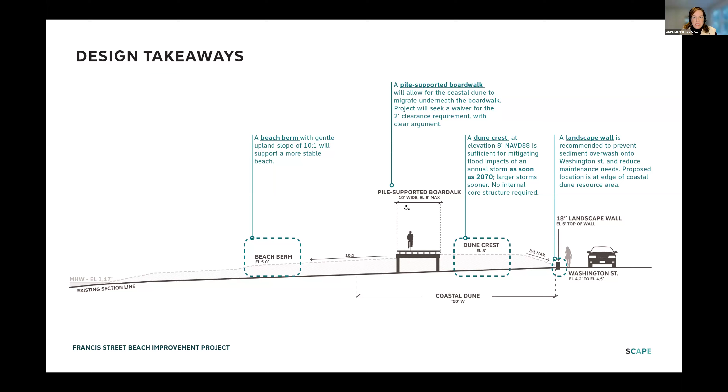So that's pretty good. And then you see that landscape wall—that's a synthesis of the takeaways that we're using as a basis of design.

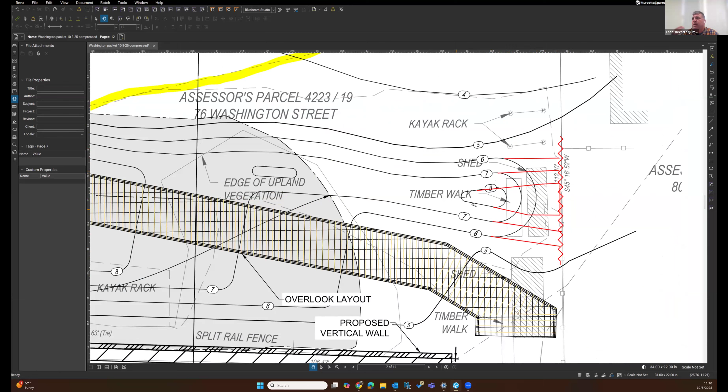In Woods Hole's recommendations, which we agree with completely, specifically on the south side, the grading was dropping off, and there's an existing sheet pile wall along here. To close this off, there will likely need to be a slightly longer sheet pile wall or an extension of that on the property to tie into the neighbor, allowing the dune to be at elevation and not higher than the adjacent grade on the other side. So there's definitely a proposed wall parallel to this along the beach, just to hold back the sand and the grade to the neighbor's property.

One thing we found out over the last week and a half is that this existing shed actually has a restroom in it. So that'll have to be incorporated into some of the waterfront structures and supplies there that stay as a restroom and water supply. There's going to need to be some work on this interaction here.

And Todd, that's connected to the sewer, right? Yes, connected to the sewer.

On the north side, with the abutting property interested in doing some sort of dune protection, there was a discussion of a high velocity area between this property and the proposed dune, so the high velocity that could potentially scour and cause end scour on the dune will have to be addressed. One option, based on no movement from the abutter or any connection with them, would be to use a geotube along the edge, so any scour would protect the main dune and only damage a small area to be reworked until a connection is made further with the abutter.

And I think Laura's team has some sketches of some of that extra grading that would be needed.

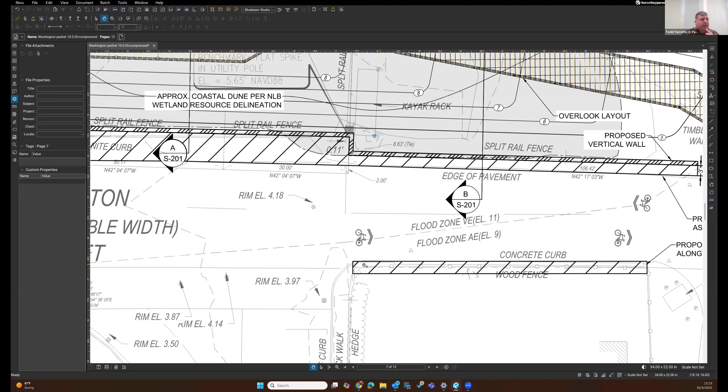What we did discover was the property adjacent to, on the other side of Washington Street, the actual fence currently encroaches onto the public right of way approximately - a little more defined survey work might be needed in this area for the actual property line. But there's a potential that a walkway or sidewalk could be installed on this side, similar to further down on Washington Street. So those are some public safety issues we're evaluating, and Laura, you're going to be illustrating that a little bit better than we are.

Those are the high levels of the structure. One of the things we addressed, with this not having a wall in the dune down the middle of the core, is being able to get the dune functional at 8 feet while maintaining a 9-foot boardwalk elevation. The dune has to be both on the seaward side, underneath the boardwalk in an area, and on the landward side, tying in so there's a full barrier. One of the other challenges is the grades needed on the beach side and tying in ADA accessibility into this beach.

Luckily, this ADA ramp is on the beach rather than in the dune, so burying the structure into the beach is going to be a lot easier permitting-wise than in the dune. We want to make sure we extend it far enough, buried under the beach nourishment, so that if any storm scour occurs, you don't have a drop-off for safety purposes and ADA requirements.

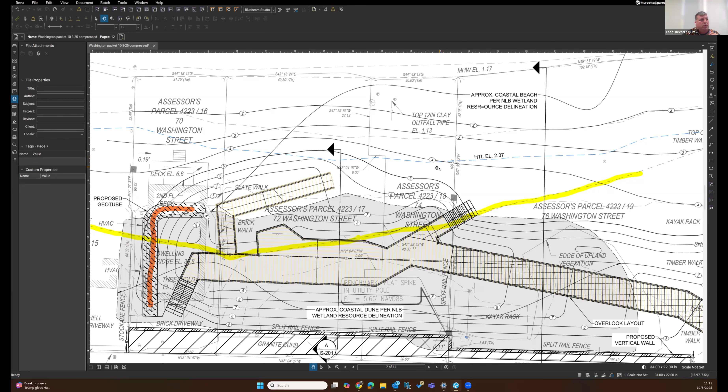It should be noted that we are filling below high tide line and possibly below mean high water. That just adds a permitting aspect to it, depending on what we need to do, but we're definitely going below high tide line. According to this plan, until we get into it there might be a way to address that, but the slopes that Woods Hole Group recommends require us to extend that beach further out.

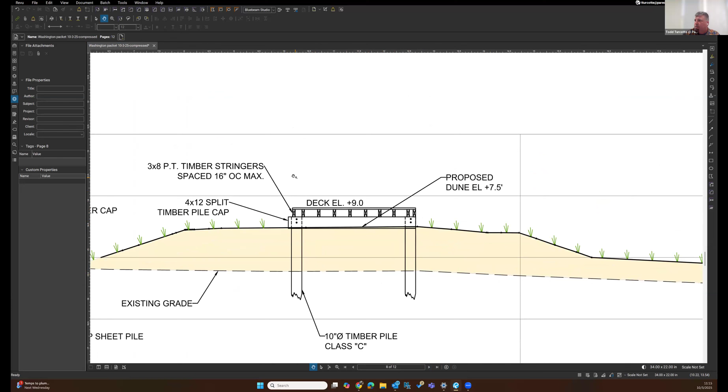To illustrate what we're talking about in the cross section: the minimum, when the deck elevation is at 9, the minimum dune elevation on either side has to be 7.5, so we don't have to have a rail, which would be another 3 feet of obstruction of view and everything else. So we would be up around 12 and a half feet.

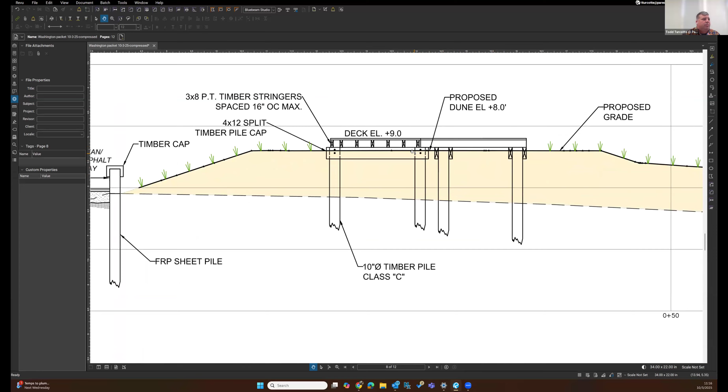Again, landscape wall, pedestrian bicycle path, walkway. Then the areas where the dune is going through the structure is actually at elevation 8, so it'll be right at the bottom. It'll almost be like the boardwalk is floating on the sand - it'll seem like it's not even supported because it'll be right up to the bottom of the structure. So those are the recommendations to get that through.

As stated before, the 2-foot separation is from the dune. The challenge with that permitting aspect is it exists at 4.5. So our approach is to accelerate the accretion of the dune, man-made, and allow that to move through. We're technically 4.5 feet above the existing dune, and we're making it a higher dune - an 8-foot dune. So we're naturally accelerating the accretion, and it's still allowed to move, but that's going to be a permitting challenge that we have.

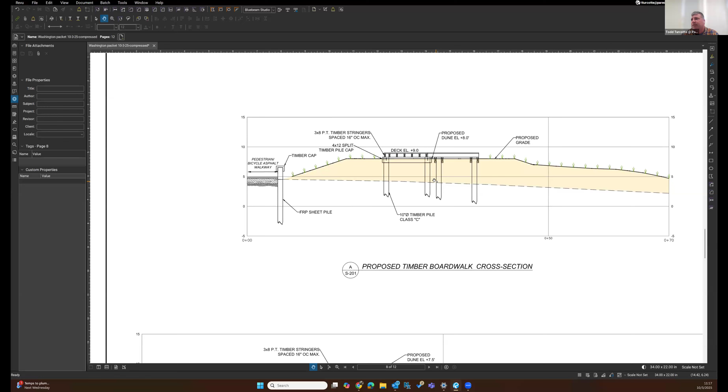Adrian, did you want to highlight any of the other permitting stuff we've been matrixing and going through right now? Sure, I can just talk through the permitting thresholds that we're looking at right now for the project.

Most of them are pretty standard for coastal work. We're expecting an Army Corps of Engineers Section 10/404 permit, the DEP 401 water quality certification, DEP waterways, and also an order of conditions through the Wetlands Protection Act for the project. There is interest from the Division of Marine Fisheries because of shellfish habitat on the beach, but it is restricted, so that is somewhat helpful. There's no Natural Heritage Endangered Species Program priority habitat on the site, and of course this is a velocity zone on the beach, and we will be filling inside of it, so that will be a MEPA threshold.

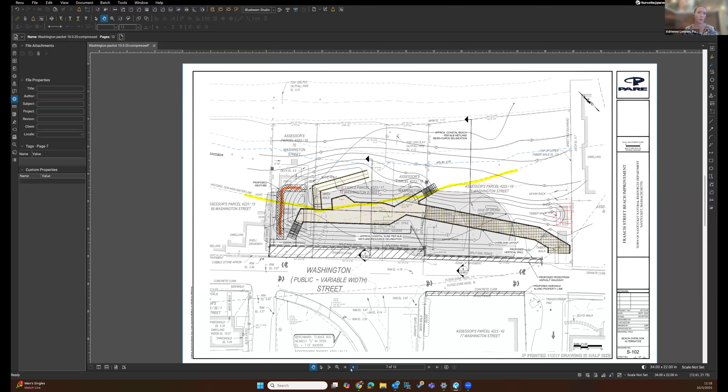There is EJ for MEPA in the vicinity of the project, so we're anticipating the expanded environmental notification form and minimum a single environmental impact report as part of the filing. Generally speaking, the design is not going to influence permitting in terms of thresholds. Everything we're qualifying for, we're going to qualify for regardless of which shape or what the final structure looks like. It's just going to be a matter of how much we need to fill in the resource area and how much we need to move around the dune to accommodate those two designs. But that will all be negotiated with the finer points with the coastal manual as we move through.

I'm happy to answer any questions about that. But I'm looking forward to seeing the design come together.

One other note is we are beyond historic high water line, so there will be the Chapter 91 license required. That was another one. So that's where we're at.

Laura, if you want to continue, or is there any questions? Anything we want to talk about before we jump in? We've sort of begun to interpret the technical understanding that Todd and Adrian are providing into some sketches, but technical questions they can field probably better than we can.

Can I just ask a quick question? This is Rachel. I'm wondering if you could just run through that list of permitting agencies that we need permits from really quickly, again, please. Yeah, absolutely. So federal permitting will be the Army Corps of Engineers.

At the Commonwealth level, that will be DEP Waterways, which is a Chapter 91 license, and the DEP Water Quality Certification Program. Locally, you will administer the Wetlands Protection Act through the Nantucket Conservation Commission. The Division of Marine Fisheries will need to be consulted through the Wetlands Protection Act process because of the shellfish habitat on site, but not the Natural Heritage Endangered Species Program because we don't have any priority habitat on the beach. And then Coastal Zone Management will be in consult or agency consult through MEPA because of the expansion of fill and velocity zones.

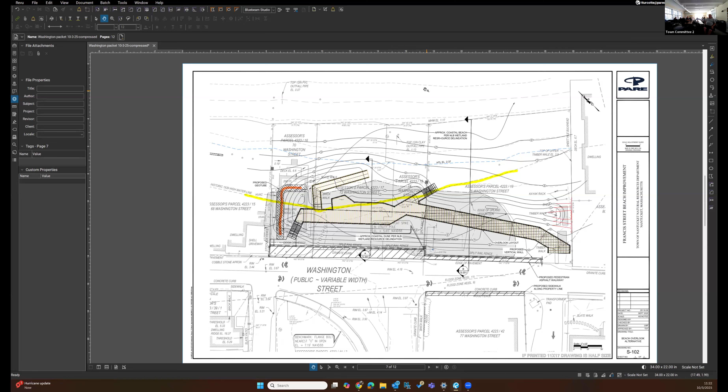Okay, I'll stop sharing. I think probably when I get into some of how we're beginning to interpret this, and caveating that we're still kind of in sketch mode, probably some other things will come up that both Kirk and Todd and Adrian will want to weigh in on.

Okay, so just kind of a site context drawing here. And we, I know last time we talked about that sidewalk that had been built more recently at the crossing here at Meter Street.

So we have an updated aerial photo that shows some of these key constraints. We see that coastal dune is delineated all the way up to the edge of pavement. One other thing of note is that the Washington Street extension does narrow to 17 feet in this area, between the sidewalk and this sort of bump out.

I know that's not really a two-way street, but something to think about as we're trying to tackle this question about no sidewalk. And then you can also see the right of way on the opposite side of the street, which again sits behind that fence line.

So we started to sketch, just in diagram form, a couple of possibilities of how we might address pedestrian circulation. We want to provide an ADA accessible pathway here for access onto the beach. If you're approaching from the Washington Street extension, that's fairly straightforward. If you're approaching from the other part of Washington Street, it gets a little tricky.

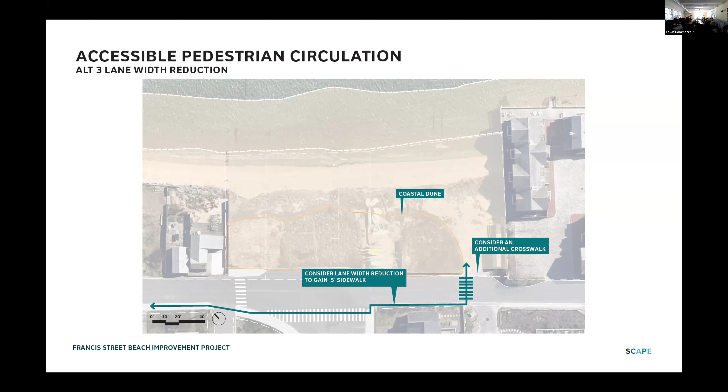So I have a question - do we try to extend that pavement on the beach side a little bit down Washington Street extension and see if the regulatory agencies will allow that? Yes, that's a good idea. Or do we do this version? That home has a fence and garden and everything.

Can I ask a question? Because it kind of goes on to the topic - the idea is this is phase one of many, and this is going to be a longer boardwalk, right? And I hate to bring this up because I wasn't in the original concept questions, but is there a reason that the ADA ramp has to occur on the south end and not at the crosswalk? So we've been talking about this, Todd. The reason for the long-term plan, let me actually just go to it.

The reason for the long-term plan is if you're a bike coming from the Washington Street extension out to all the bike lanes, or even as a pedestrian, this is the accessible path that can continue all the way down. However, in the short term, a major flow is coming this way, and in both scenarios right now, we're showing stairs there.

I was just going to say this, when we get together and talk about grading next week, if we don't have to be 2 feet above the dune with the deck, we may be able to get a ramp on both sides.

I think we need to study it from a design perspective. It's going to change the geometry. Lynn, you've been looking at this really carefully from a technical grading standpoint. I don't know if you feel there's a barrier there, but particularly in the dune swoop version, I think we may be able to get a ramp from both sides. Do you have thoughts, having looked at it a lot this week, Lynn?

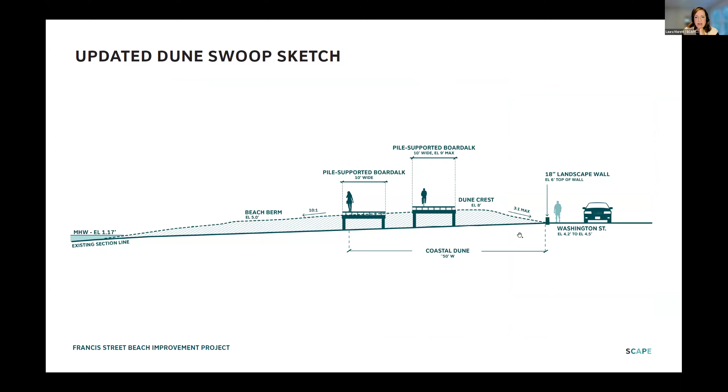So that's one sketch, and this is sort of how it works in sections. You have that upper, the main part of the boardwalk that sits above the dune crest, and then this is just the pile supported boardwalk as you ramp back down to the beach. So you're seeing both of those, the landscape wall. I think this is similar to what we looked at before, but the dune itself is about 50 feet at the crest.

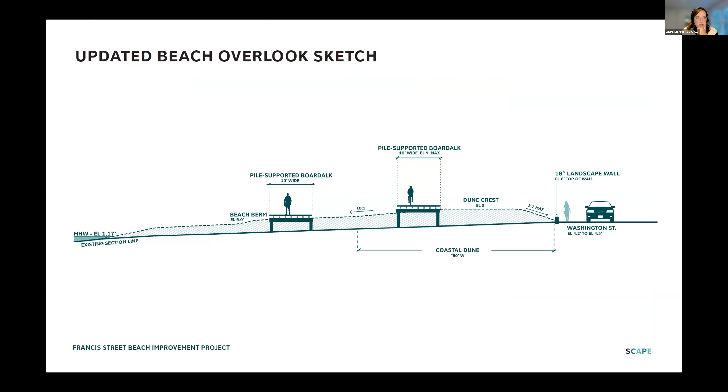Laura, I see that Joe has his hands, sorry, up. I'm not seeing. Yeah, Joe, go for it. No, it's fine, it's a question that applies to both.

So I'm glad that you made it through. Just given what we've learned about, I'd always thought that shack was just a shack. And given that there's some infrastructure in there, I'm wondering, Todd and team, if you guys have any comments about the feasibility from a permitting standpoint of moving that further landward and further seaward, excuse me.

Yeah, that's one that I would say we want to keep it, especially that it's a bathroom. We probably want to keep it closer to the roadway if we can. So that's going to be the challenge. I don't see with the grading how we do that. Yeah, it's going to be. Then the question becomes, is it necessary? Do we need it? That's maybe a Leah question. I know you had some, and we're going to have a touch point with them, right, Leah, coming up?

That has not come up in this conversation. I'm kind of shocked, we didn't know. It's not in the survey. We didn't know there was sanitary. It was a shed, it was a shed. I don't know anything about it. I can't believe I don't know about this. Yeah, I think it's sort of for the rental, it must be for the rental people. But to get it hooked up to sewer and actually have a real bathroom, like that happened before, Christ, it had to be done.

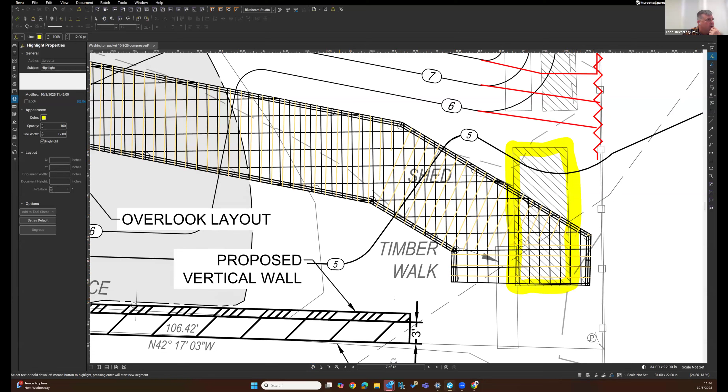Is it possible, here the dune is here, could you turn it and put it in here, have the dune go around it, the boardwalk go around it? Maybe, because we're altering how the kayak access works, we basically cut off access for the kayak shed, they'd have to go up the ramp. Having it here I don't think really affects anything, you'd have the boardwalk go around it and this be whatever it is.

It would be better if it was actually a public amenity, like if people could use the restroom for the beach, it makes more sense to me. Yeah.

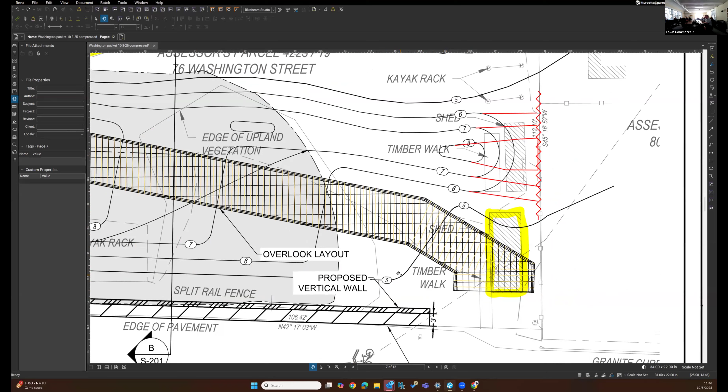As far as where this is, could it go on top of making it a dune? I don't think that works. I assume they have a lease from the town. Yes.

Do we have the delineation of that lease line? There was some stuff about that a couple years ago, about how they were kind of migrating a little bit. But this has never come up in any meeting. I can't believe it.

Are we going to have to provide some stairs for them to get to their kayak for their leased area? Is it a town facility or theirs? The shed, I don't know. Where the people put the bathroom in the shed?

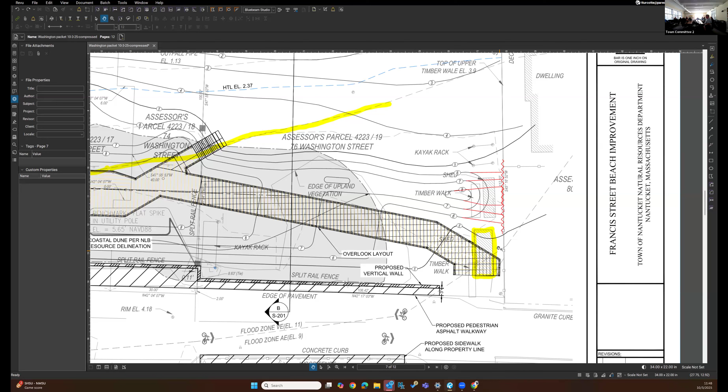This is one of those things, like the one at the end of Madaket where it got taken out. It's just there - this is unbelievable, I'm gonna get out there and look at this, see what's up. There has to be some kind of solution, Laura, for this. This is a Nantucket problem, not yours. We could study some different locations, but I think you're gonna have to dig into what the agreement is.

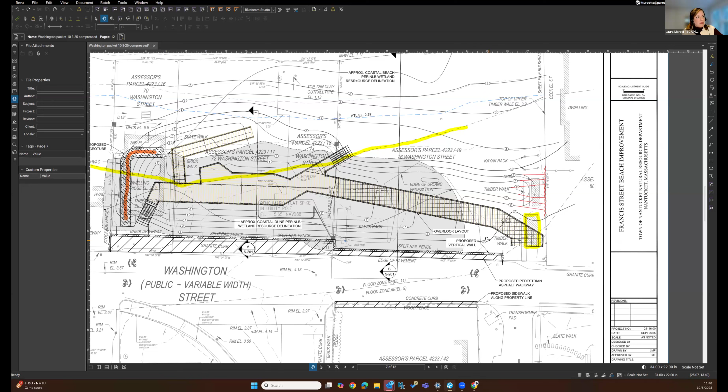Can I ask you a separate question from the last meeting that adds to this? Which one of these is best? I know I asked this before, there's a lot more people here today. What's the best for the future addition - adding on to this, which sketch?

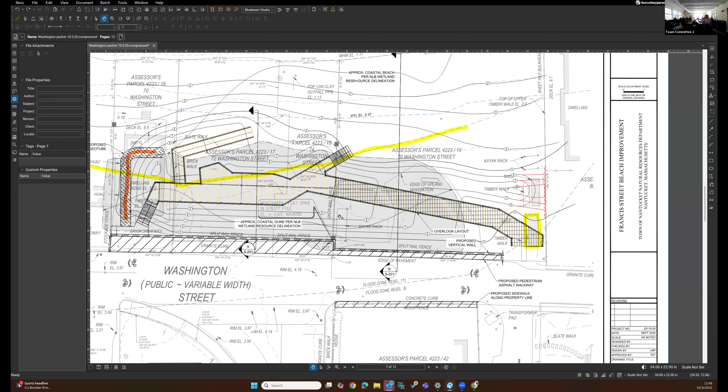I'm gonna retake the share. Both of them, Laura, are adaptable. I think that's one of the questions there, and they have been graded to accommodate at the high point of 9, another boardwalk connection to the waterfront. So you can see where 9 is. We would want to maintain that ramp that slopes down accessibly just to maintain access to the beach. It could ride that high point.

This one might be more sinuous, especially if you are a cyclist, that would allow you - and we know that probably the commuter type bikes are going to be on the street in the long-term plan. So it's not like you need the speediest way, but for a bike, a more sinuous connection is better. But here, you could still create a connection that goes this way, just a little bit more angular with the geometry.

Both of them are designed with the requirement that they need to be adaptable to a future connection. It would just take a different form.

So I think maybe we go through this and then I would ask Kirk, Todd, everybody chime in on anything we're missing in terms of the side-by-side comparison. We heard a slight preference for the dune swoop from the community, but it wasn't a huge difference. Obviously this one is the more curvilinear form that pulls from the language of the waterfront and the creeks and some of the more sinuous boardwalks we see around Nantucket. This one has a little bit less of a big boardwalk overlook area.

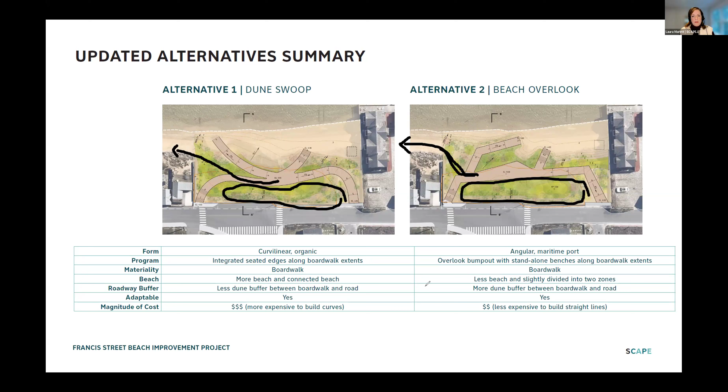I have a question about the coastal modeling and maintenance. During large storm events, does one perform better than the other? For the angular one, would that cause sand and debris to get stuck in that crevice, and would the waves hitting the structure cause more damage than the dune swoop?

Your opinion, Kirk and Joe? We looked a little bit at that type of stuff. The overall performance of the sand movement isn't going to be that different between either of the two cases. The thing related to potential damage of the boardwalk itself is anywhere there's those beach access points, where you get down at grade out of the resource areas.

Those are where you're going to see scour and potential damage to the boardwalk during really big storm events, versus down here, and on the swoop, there's those portions there. So when you get down at grade off of piles, that's where you're going to see the impact. What we need to work on now is the grading of the dune and beach relationship to help minimize that as best we can.

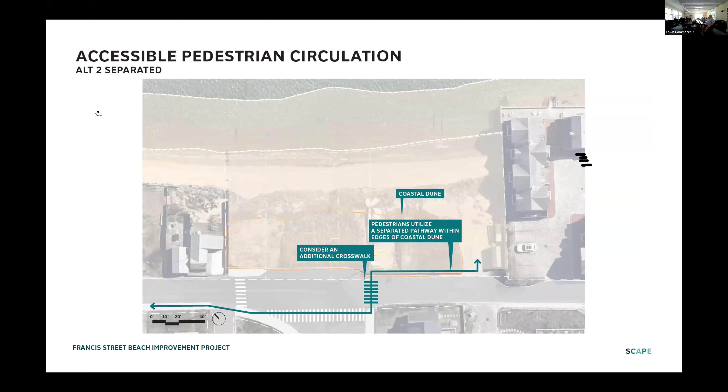If you look at the picture, if you look at it now, they're going to put the kayaks up against the boardwalk, and walk the kayaks down the dune. If you look at it now, it's kind of clear on the right-hand side of the property. When you look overhead, where the kayaks have been going, where that clear area is, that's all been walked and stored, and it's going to end up like that somehow, just because it's going to get used.

So we have to figure out how to put that in a way that's legal. And if we're changing that, we either have to get rid of the kayaks, if we're not allowed to do that, or we have to accommodate it somehow, I would think.

Somehow the town of Nantucket is calling me. I think everyone I know is in the room over there, so I will not pick it up.

Sorry. Or we use the slope up going up to the new crest, as that's where the kayak storage is, up high out of the beach.

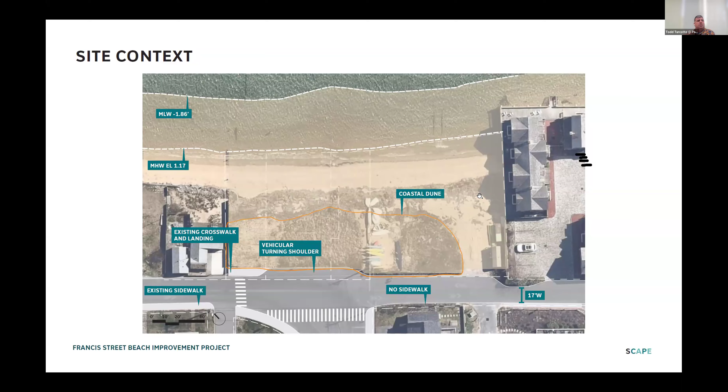Just so you know, we have met with Ryan Pitch, who has the licensed kayak rental, and discussed all this. At that time, the understanding was that this was something we were going to try our best to accommodate, because it's a service that's been in existence for a really long time and people seem to like it. So thinking how to keep it was a priority. Just to remind everyone, that's where we started.

And he liked the idea of there's a stair or whatever it may be, the stair down here. I would love to understand, I think we are going to meet with them again, but is it preferable for them to have their operation down here more beachward, and of course there's permitting questions with that, or would it be better to be back closer to the road?

I believe when we talked to them, because they store the kayaks down at the beach, on the beach, we need to accommodate an area on the beach for the kayaks to be stored.

He didn't really mind, obviously people are going to have to walk on the boardwalk to get down there. He seemed quite amenable, but closer to the water is easier, because then you just drag the kayaks into the water for use.

It would be kind of cool if we could integrate kayak storage into the design of the boardwalk itself, as part of that clearance. Maybe where there's more beach, that might be an option, outside of the dune.

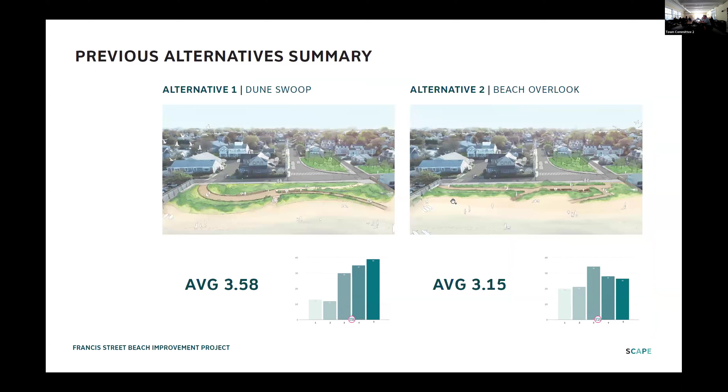Matthew, so at the beginning, yes, it's nice to look at this, the roundness and the fluffiness, all that, but after this conversation today...

Outside of the bathroom, God, I can't believe it - that's a public bathroom. I found the concession, got the bid. Who built it? I don't know, but that's unbelievable. Yeah, they basically have a 40-foot rental, they have to keep their stuff within the 40-foot rental, and operate a public bathroom whenever they're there. Very responsible - yep, they have to clean it and supply stuff. It's through 2027, their lease. They're supposed to stay within their 40 feet, can't do motorized. That's unrelated - well, that's the exact existing concession, when they bid, that's the details of bidding on it. So, okay, 2027 - could we accommodate them in a different location with the renewal? This thing isn't getting built before all of 2027. Laura, now we're getting back onto the bathroom again. The problem is you have to just trust this - it works where it is, like no plan, it just works. Especially with the way that new road comes in from Washington Street, from Union Street, people can kind of zip in there with their bike, whatever, without making as much traffic confusion. And it's a safe place - if you put it somewhere else, you'd have to cross. Right now they can go along the harbor without crossing the steamship or anything else. No, that makes sense, makes sense, anywhere out there. You don't want to go towards town with this, that's insanity.

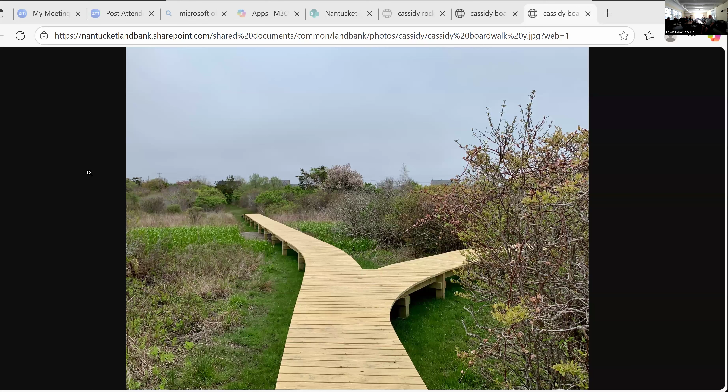That's beautiful. But these are examples of curves. This though is actually a really good example because you can see how hard it is to actually get that curve, right? Because this was incredibly challenging to build. You can see that with the turns, it's a huge structure. This is light compared to this, pretty light, but this is actually at Madaket Road, so it gives you a little bit of an example. I just wanted to show everyone that.

Over just wetlands. Rachel, you all have built so many boardwalks of different forms. It'd be interesting to hear your perspective of usability, constructability, all that. We rarely build these curved boardwalks because they're hard. So this is really kind of one of the only spaces that we have one that I can think of. I'm sure there's others, but we get one that's curved like this too.

Wouldn't it, oh, in Sesachacha Pond? Yeah, but it's the same builder. Actually, these are far less frequent, just for simplicity's sake for us. We are proposing the curve one at East Creek. That's true, so that could get revised, Todd, frankly. I can see that in our land of cost cutting coming back as not curved. But I just know this is a far less frequent thing that we do.

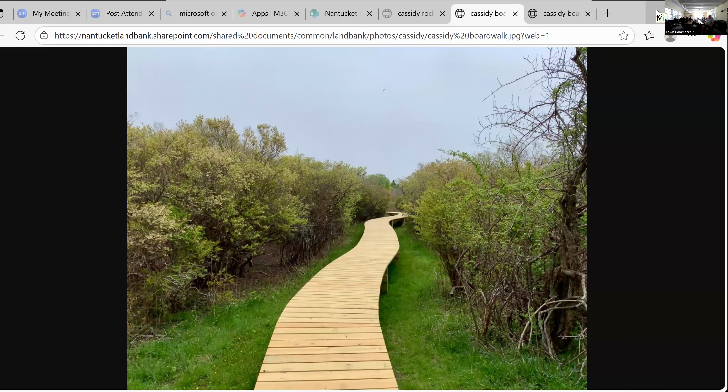But it is something we do, it's just not as easy. Which is why Easy Street is what it is. That was my next thought, I was thinking about that. And it's awesome, and it's great. Definitely should have a couple trash barrels, but it is a great thing down there. Unbelievable, lots of people use it. It gives people kind of nooks to sit in. It works really well.

When you are dealing with those big timbers, it is harder to negotiate curves with those big timbers, for sure. That type of boardwalk just gets exponentially more difficult when you're dealing with something that's chunky. So feasibility wise, the angular one, I know aesthetics are maybe different, but feasibility, the angular boardwalk is easier. And over the long run, like all the way across Washington Street, you'd end up with more cost, like Easy Street.

You can see the kick rails, you see, I think there's some, we did look at this. There's a vocabulary here that would carry over to Francis Street Beach if this is deemed, you know, preferred and easier.

I think they could both be beautiful. They could be beautiful, they will be beautiful. Sorry, excuse me.

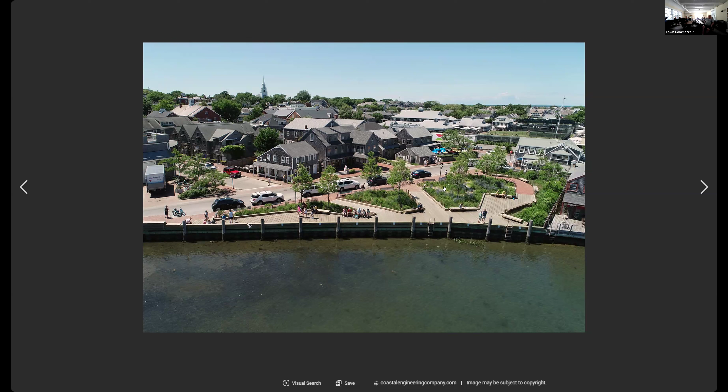Does anyone want to make a motion to take a vote? Ready for that? Maybe you're not ready, but what do you think? Go with the easy one.

I just feel the other part of this too, the future stuff, like Easy Street has a future, but it's more towards the steamship, Old Skipper direction than one part of it. The rest of it is not gonna just be a little piece over here. This is different - this is the sort of train station that's gonna only have a little bit of rail, and we're gonna add some more later. We don't know when that's gonna be. I think it makes more sense to have the angular model.

Here's the question: which one is preferred by the neighbors and which will tie into them better in the long term? Is there a difference? The swoop, there's less of an angle to tie in - you don't have to make that hard left turn. Do we know their preference from all the meetings and things? Which is more likely to help work with them?

I'm blanking on his name, but I spoke to that gentleman quite a bit at the public meeting. He didn't indicate a preference, just a desire to tie in. But I know you all have had conversations since then.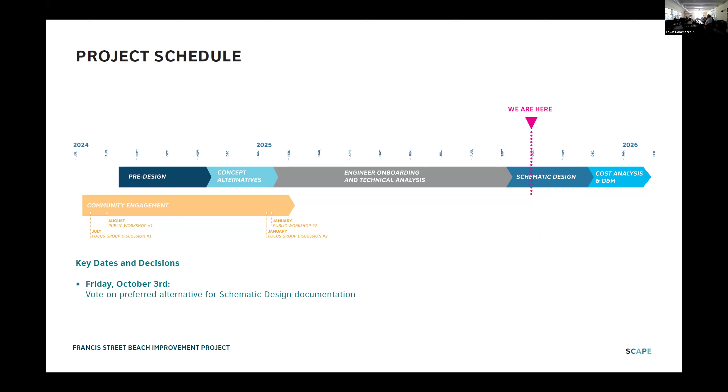Thinking of Route 93 in the 70s, they had the little ramp and it was stuck there for 50 years - finally got it done. The bridge to nowhere, yeah. So I don't know what the answer is now.

Can I make a comment that may steer it a little bit? If we can go back to the comparison between the two - those two alternatives aren't that different, except for that piece that goes to the north. On the dune swoop, you've got this curvilinear swoop headed to the north. The beach overlook, it's flipped, going to the south.

This ramp here - otherwise, they're not that far apart. It's just one's a little more angular, one's a little more curved. But maybe if we just agree on that ramp that goes to the north on either one, and then fine tune the angles or the curves.

That's good - in other words, come back with two more fine-tuned sketches. Or just one, like you said, with some changes in the visuals. That's a good idea.

The thing I'm looking at is this part is the same - you're talking about it's just the curves or corners, this versus this. That's the only difference. Am I making the right mark for what you're pointing at? And if we can agree on that in both of them, we're not that far apart.

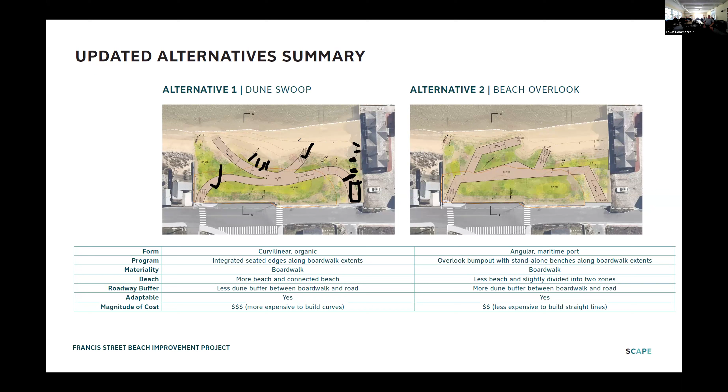But I hear what you're saying. Yeah, when you do it, maybe it doesn't have to be right next to it, but should it go over to the right 10 feet or so? I don't know, when you're looking at it, think about them dragging kayaks and being 18 years old at the beach all day.

The distance, I think what Matt is alluding to, Laura, is the beach might become more popular than it is now. Yeah, for sure, hopefully. There's a handful of people laying on top of the seaweed now, so they almost fell over. It's like a bed because of the seaweed. So just tell the truth, I think it will be more attractive. There will be more people, but I don't... so I think that's what he's kind of thinking.

It will be busier. I'm talking about the employees there dragging stuff down, pulling it all back up. Make sure it's easier for them. When I was a kid, I pulled chairs and umbrellas down the jetties. Very seldom is there a storm in the summer where they'd have to really batten down the hatches down there. It's not a problem.

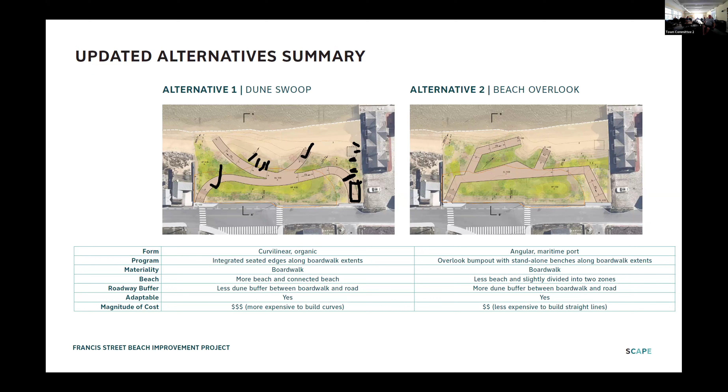We'll find an area for the kayak storage and also the public kayak storage as well. Is there public kayaks? Yeah, I didn't know there's so many. No, I know there's boats, but kayaks on the beach, people just leave them up closer to the road. Are they stored on the town or the land bank side? They're on the town side. Do we need to keep providing that? That's a question we'll have to ask Sheila, the harbor master.

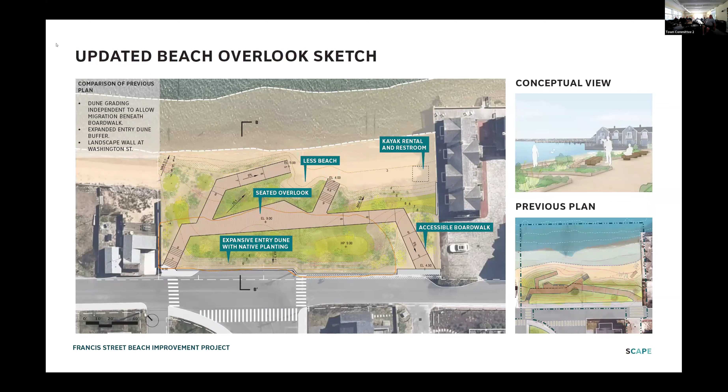But we did hear in the public meetings that the public would still like storage there. Okay, well, you don't want to take that away, then another controversy.

Alrighty, so we're approaching 12:30. The next steps are... Laura, do you want to talk about next steps? Yeah, can I just reiterate what I heard?

Same page. So next steps, we don't have - what is our next meeting, Leah? I think the meeting is October 24th. So we're going to be doing some studies. Maybe we can meet with staff between now and then. I know we have next week as an off week. We're going to be moving into some of the technical documentation, but I think it'll be important to come back next time to talk through these refinements that we just discussed.

Okay, Todd, from your team's side, what are you thinking for the next touch point? Yeah, I think we're going to be wrapping up our permitting with this decision, start moving through some of those - not high level, kind of the memo and what we're presenting - starting to get those into draft form and moving along. So I think we'll be able to make some good headway now with this direction.